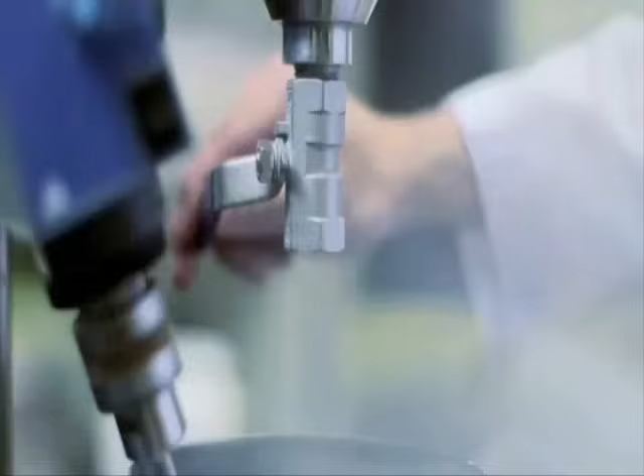At present, SMS offers a wide variety of modified tapioca starch products for applications in various industries, such as the food industry, the paper industry, the adhesive industry, the textile industry, and also for the construction industry.

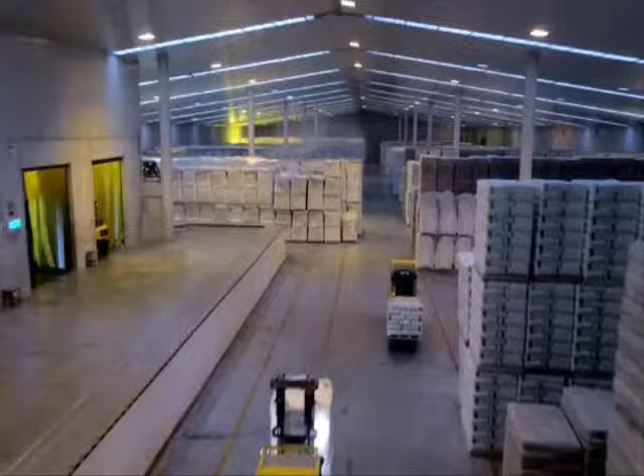Has earned carbon credits of the CER's Certified Emission Reductions type from the Clean Development Mechanism Executive Board under the United Nations Framework Convention on Climate Change, UNFCCC, for reduction of 100,000 tons of carbon dioxide per year. This testifies to our determination to play our role in environmental responsibility.

By adhering to our philosophy that we believe in creating value from tapioca starch through science, technology, and knowledge management in an overall business process, as well as through dedication of human resources.

SMS Group is committed to our mission to create value, to foster ongoing development, to create first-rate innovation, and to improve the quality of life of consumers worldwide.

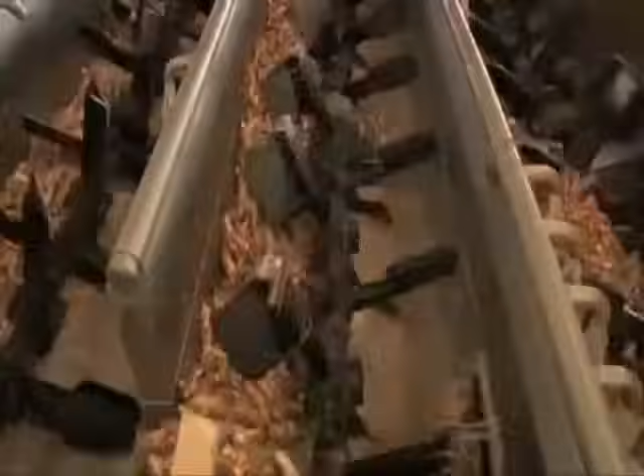Tapioca is one of Thailand's important economic producers. There is root production of 22 million tons a year. It can be turned into starch for consumption or as raw materials for processing in various industries such as food industry.

Textile industry, paper industry. Products made of tapioca are used both domestically and exported to other countries. As a result, tapioca is a factor that drives the country's agricultural economy.

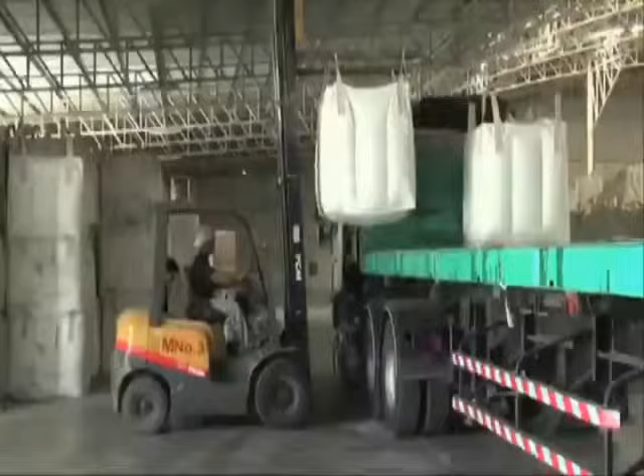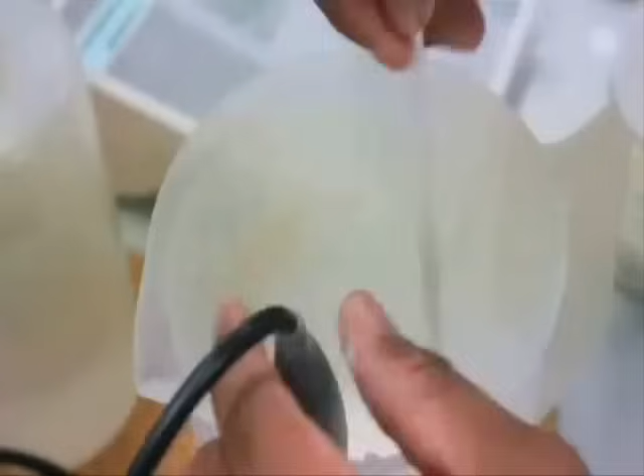Iem Heng Tapioca Starch Industry Company Limited and its subsidiary companies consider quality development of the products an important matter and have adopted the system called Good Manufacturing Practice or GMP, as well as production control and management system with emphasis on hazard analysis and critical control point or HACCP. This is to ensure the standards and quality of the company's products.

The company has been recognized and endorsed by various institutions as follows: 1. International Organization for Standardization, ISO 9001, version 2008. 2. Halal, by the Central Islamic Committee of Thailand. 3. Thai Labor Standards, or TLS 8001, by the Ministry of Labor. 4. Standard of Responsibility for Social and Environmental Impacts, ISO 26000.

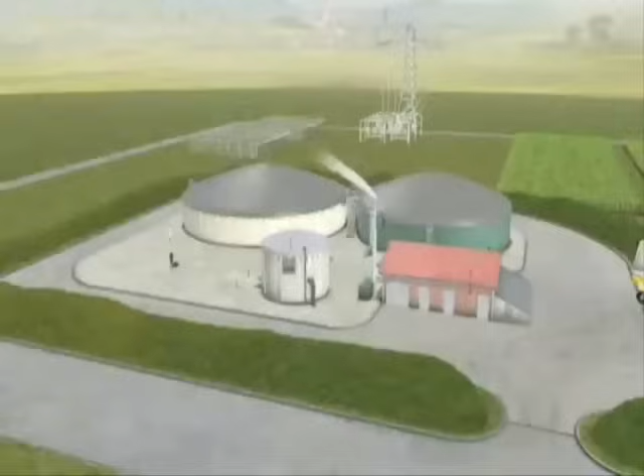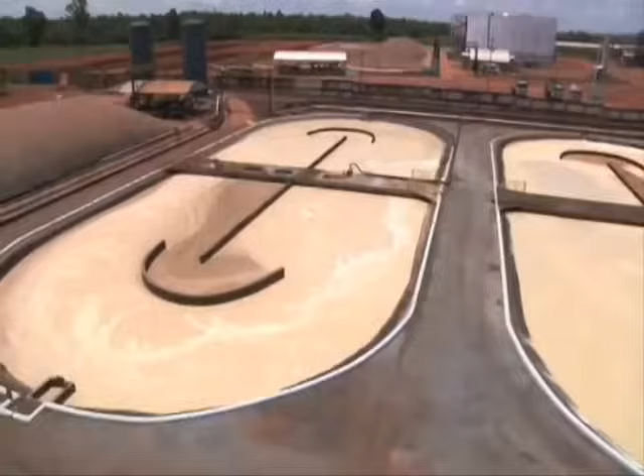In terms of public benefits, Iem Heng Tapioca Starch Industry Company Limited is aware of environmental conservation and global warming. It has set up various projects to conserve energy and natural resources, as well as occupational health and safety at work for its employees and community, such as: 1. Employs biogas from water treatment system to replace gasoline and save energy consumption, as well as to protect the environment.

On the other hand, methane gas can be used to generate electricity and sold to the government. In 2009, the company was awarded the winner of an ASEAN Energy Award 2009 in the category of renewable energy projects that are not linked to the electricity grid, or off-grid.

2. Water Grids Project, a water treatment service to produce and supply clean water to cultivators around the factory during dry seasons.

3. Set up the Agriculture Loving Community, which consists of 300 members. They have adopted His Majesty the King's self-sufficiency economy maxim to operate the community. The company has participated in the environmental governance project organized by the Ministry of Industry.

4. Set up the project To Be Number One Iem Heng, aims to encourage rural youth to stay away from drugs, including a focus on quality of life for communities and workers in the factory.

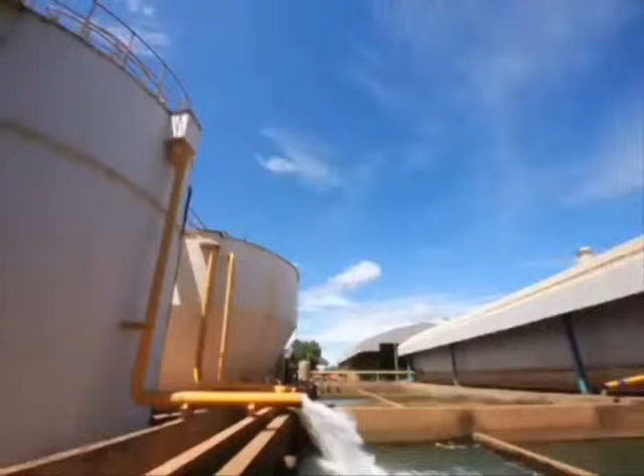From tapioca in the farm to big factory. From tapioca business to the country's leading tapioca starch manufacturer.

The determination of Mr. Bak Iem Sa Heng has become the aspiration of the Iem Heng family members to move forward, manufacture quality products to meet the demands of both domestic and international markets, to create jobs and opportunities for local communities and cultivators, as well as conserve the environment.

We are determined to take Iem Heng Tapioca Starch Industry Company Limited and its subsidiary companies towards stability and prosperity with the Thai society forever.

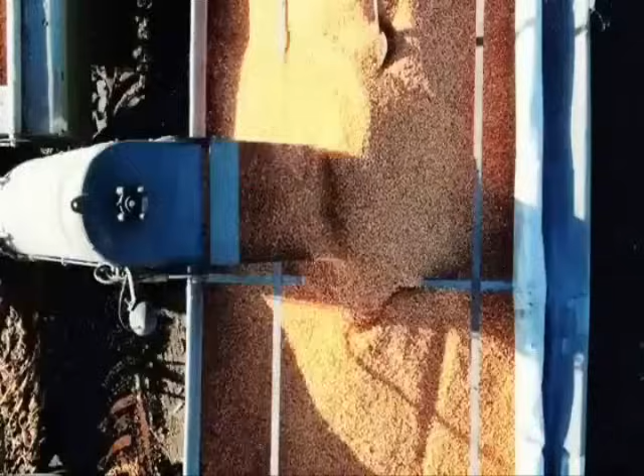Cassava is one of the main agricultural products here.

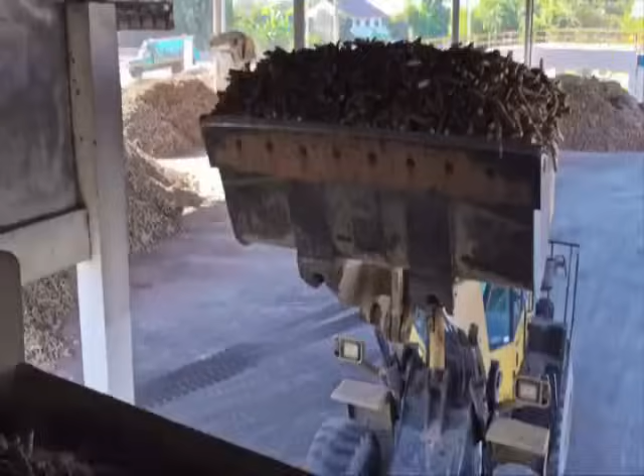The cassava brought by farmers is used as raw material and made into the tapioca starch by our production process. We are devoted to the quality of raw materials, production process, and high technology, as well as quality control, food safety, and perfection in every step.

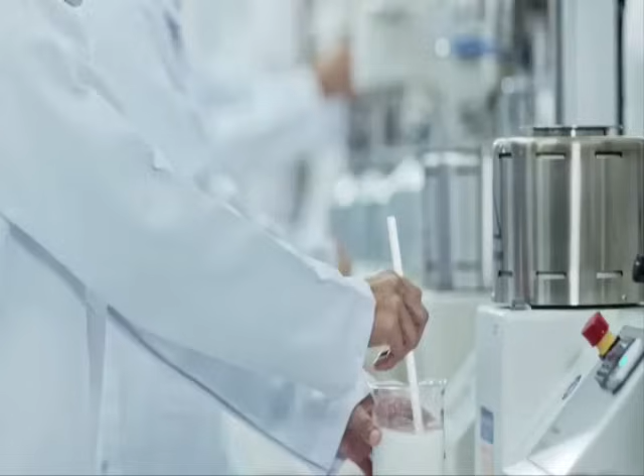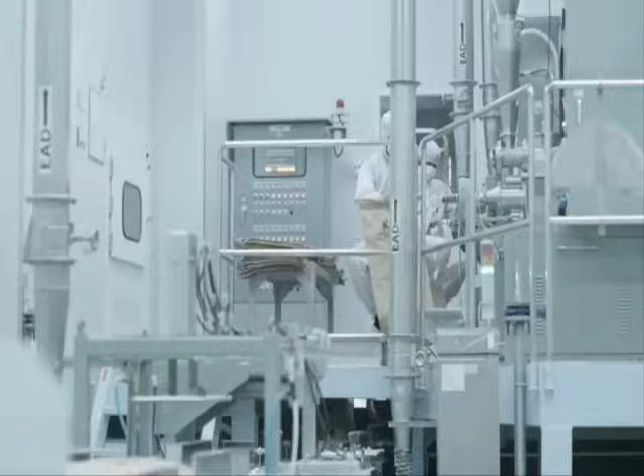All of us are proud of our products, and we strictly comply with quality regulations. We are determined to perform research and develop our products for better utilization in various food industries and to satisfy customers' needs. Furthermore, we have world standards to control every production process, packing, and loading so that we have confidence in our product quality.

We are able to deliver reliable and safe products to our customers all over the world.

Our factory takes care of the environment and energy saving with respect to local society and give good quality of life to all employees and the community as a whole.

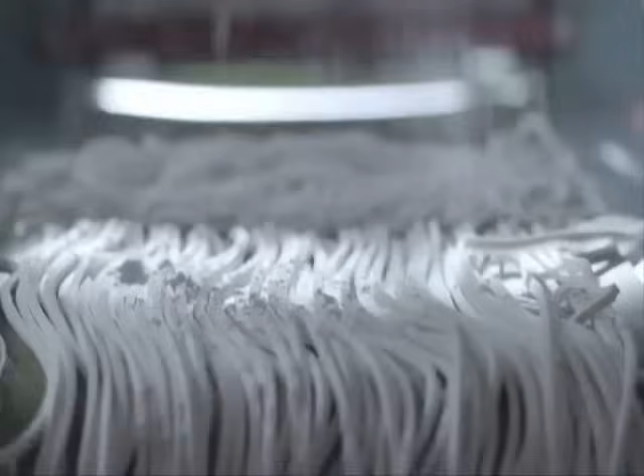Today, we are proud that our products are essential parts of various food industries, including but not limited to deep-fried products, meatballs, sauces, udon noodles, and bakery products.

Moreover, we are so proud of the uniqueness and function of our products, which help to improve the quality of processed foods. We supply to consumers all over the world the delicious experience from a variety of foods, which is produced by good raw materials and good factory.

We believe that delicious food will bring happiness, smiles, laughter, and beautiful memories. That is, mutual gratification and endless impression for all.

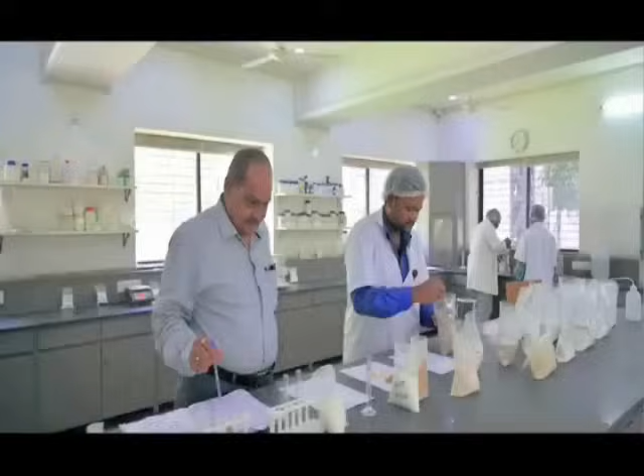Our state-of-the-art R&D facilities with cutting-edge technology are located in Lambha, Gujarat, and spread across an area of 15,000 square feet. Our R&D team consists of around 30 scientists, PhDs, chemists, and experts from various fields such as textile, paper, food, etc., who are constantly involved in creating new and improved products and applications at par with the latest trends and global standards. We are also working towards eco-friendly, sustainable, and cost-effective products.

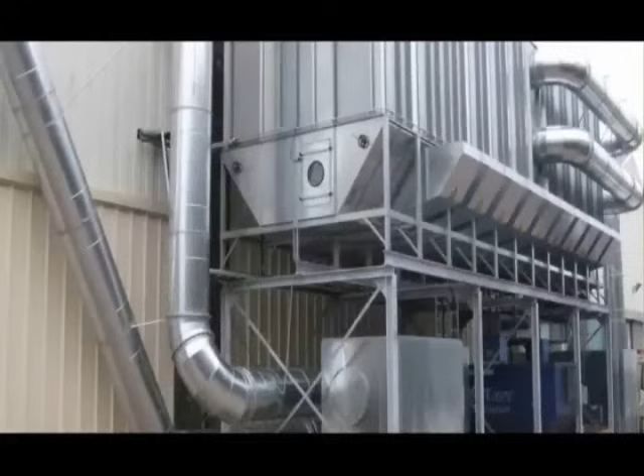We believe in adopting practices and developing solutions that lead us to a brighter and greener future. To name a few, we have constructed recharge wells, installed dust collectors, and adopted the practice of rainwater harvesting, a zero discharge effluent treatment plant, and wastewater treatment to reduce the emissions.

Sustainability is in our DNA. It has been a legacy spanning almost 7 decades of collaborating with nature, and we are growing at the rate of 13% per annum. There is no stopping us.

We are already the major player in the western and southern region of India. In the next 5 years, we have plans to cover the central, northern, and eastern region of India too. We are expecting acquisition of new starch facilities in India and around the globe.

With every milestone covered, we feel a sense of excitement and challenge that we love. We have spent all our lives discussing, breathing, and living starches. We will continue doing what we have done all these years: unravel the mysteries behind starch and making your lives better, easier, and happier.

We have started this company in the year 1951, and we have the experience of 65 years. We are into corn manufacturing and other derivatives industries. We have a backup by 24/7 to assist all the industries and to give the ready-made program to fulfill their ends.

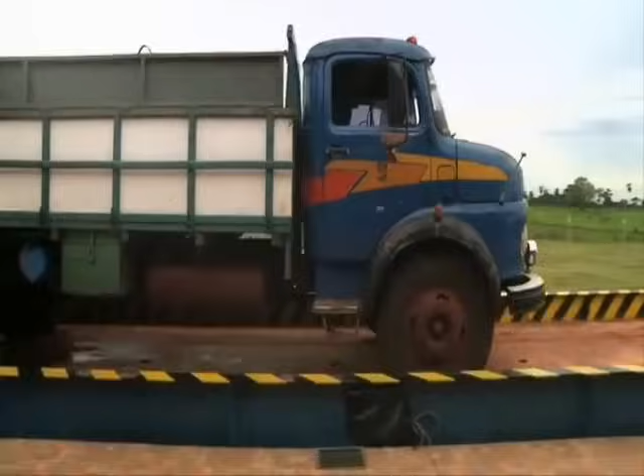Codipsa 4 has been built using only European technology and has a production capacity of 100 tons of starch a day, having the capability to double that capacity if required in the future.

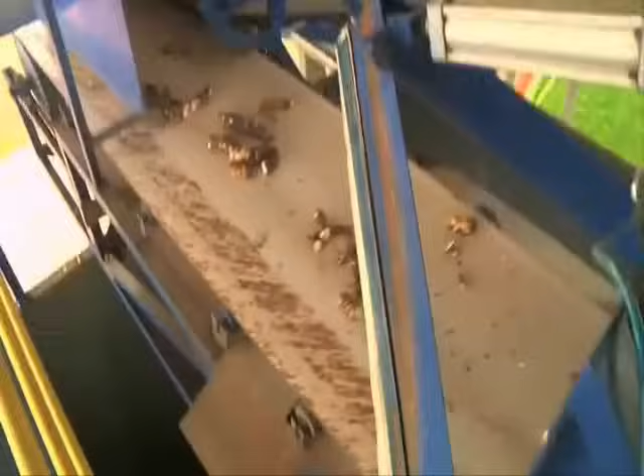Why did Codipsa have to look for world-class technologies abroad? Because Codipsa realized that the company has to be a first-class world player in order to be able to compete globally. We must produce the same quality of tapioca starch as other top producers in the world. But at the same time, we must be competitive. And to be able to offer that top quality starch at competitive prices, we realized that a good production plant is a basic requirement.

It's the only way to be competitive at a global level. We decided to go to Asia to see a Larsson plant in action for ourselves. And we saw that it works perfectly well. We saw all the advantages that a Larsson plant offers when compared to other technologies, local or conventional technologies.

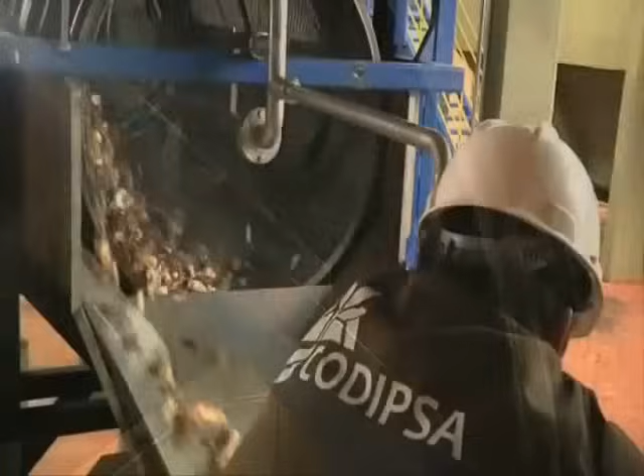At this stage, we made our decision. After having 3 plants using local or conventional technology, we opted for European technology. Our team analyzed a number of different producers of machinery and equipment for the production of starch. And Larsson was chosen because they are the ones who best understand the entire process of producing tapioca starch. Today we have a Larsson plant. With that comes a lot of hope and high expectations that with this technology we can be truly competitive in respect of quality and price at a global level.

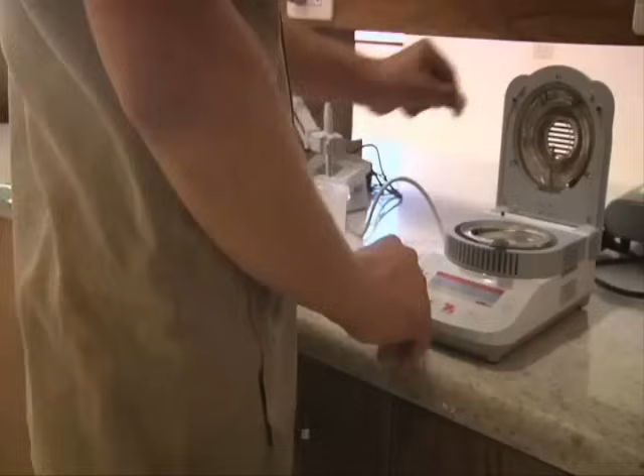Throughout the process, Larsson's designers and engineers worked in collaboration with Codipsa's technicians in order to find a sustainable solution, always keeping in mind local concerns. The main objectives were to improve the plant's capacity, the yield generated and the quality of the starch, whilst of course reducing water wastage and energy consumption.

Working with Larsson was a very exciting time. We started on the 5th of June in 2011 with the construction and then delivering of containers with all the machines from Sweden. During the installation, we had a lot of visits from Larsson Engineering, and it was very good working together with them, and we had a successful time completing the installation and have good value in the process.

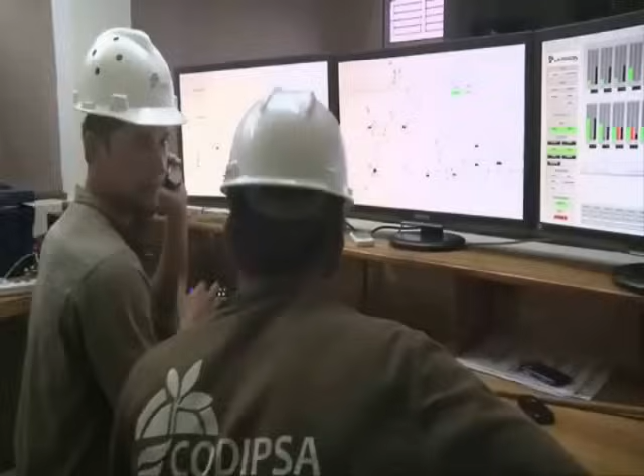Larsson drew upon its decades of experience in Europe and Asia to design the layout and manufacturing drawings for Codipsa 4. Larsson supplied all the hardware for the wet milling, all the software which controls the entire system, as well as key components for the dryer. For the remaining parts of the plant, they either advised on the purchase or designed the parts and had them manufactured by local workshops.

The entire process, from concept to commissioning, took only 12 months. The result is a fully automated, state-of-the-art tapioca starch plant.

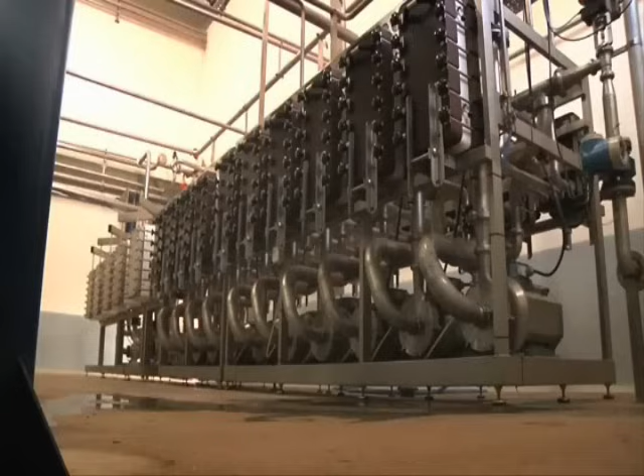Larsson's automated system not only ensures a consistently high-quality product with moisture content at 12-13%, but also helps reduce labor force. Despite its capacity of 100 tons of starch a day, Codipsa 4, for example, requires only 2 operators to run the system.

With Larsson's technology and expertise, Codipsa 4 is expected to obtain a yield of anything between 93 and 95%. That's very pleasing if compared to other production plants averaging 85%.

Here are some other factors that give Larsson a competitive advantage over other available technologies. By using state-of-the-art technology and an automated wet milling area, Larsson manages to halve the water consumption compared to other systems.

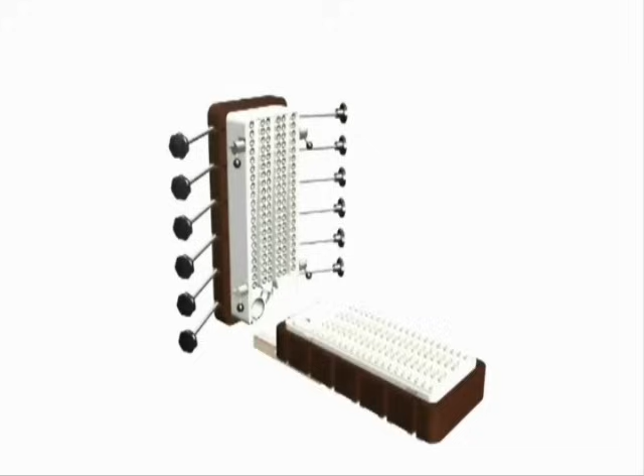Inspecting hydrocyclones can be a daunting task. With most equipment available on the market today, it usually takes 6 to 8 hours. With hydrocyclones designed by Larsson, on the other hand, inspecting is very simple and will take only a few minutes.

Larsson incorporates in its system sand separation equipment, which should be cleared by an operator every 8 to 12 hours, improving the quality of the product by reducing ash content and black spots.

Larsson centrifugal sieves are probably their flagship product. Invented by the company's founder in the 50s and continually developed over the years, today it's operational in over 50 countries around the world. Larsson centrifugal sieves are used for different applications, from starch extraction from rasped potatoes and tapioca to the fruit juice industry.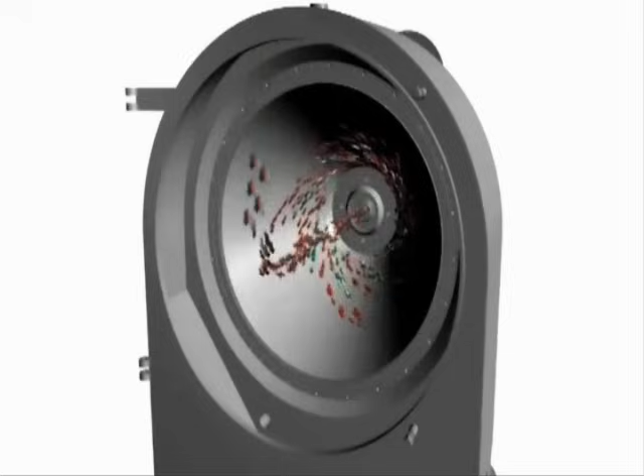But in this case, at Codipsa 4, the perforated stainless steel sheets are used for starch extraction and fine screening, requiring zero maintenance and guaranteed longevity.

In order to meet today's high hygienic standards, Larsson designed a rotary vacuum filter to dewater starch slurry. The filter is able to eliminate the liquid at an early stage, giving the benefit of longer dewatering time, significantly more than comparable machines available in the market today. On top of that, the filter is fitted with an automated downwashing system.

At Codipsa 4, the starch is cooled after drying and before the buffer tank, reducing the risk of condensation and bacteria development.

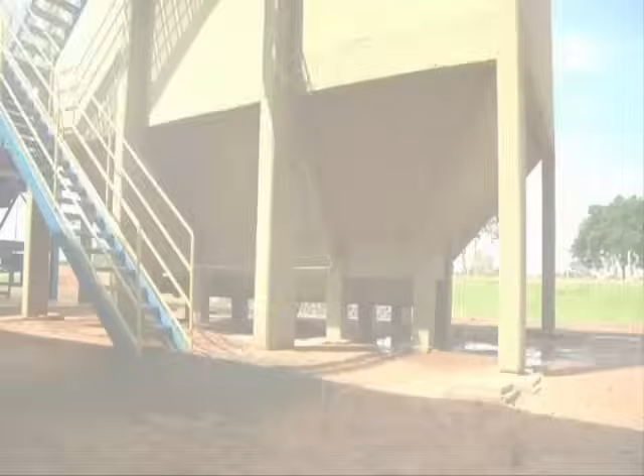Here in Paraguay, the fibers extracted from the process are used for cattle feed. However, in other countries, fibers are already used in other food industries. It's expected that the same will happen in Paraguay in the near future, and Larsson hopes to be able to add value by implementing one of its latest developments, a pulp press that begins the dewatering process of the fibers before drying even starts.

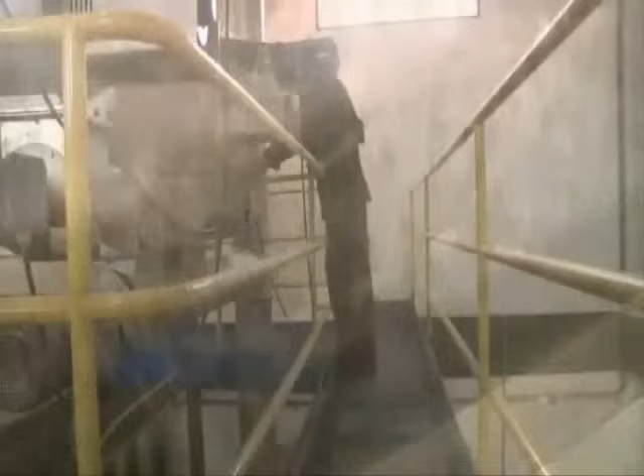We realized that Larsson understands how to process tapioca properly. Because of their deep knowledge of the products, in this case the properties of tapioca, it is this knowledge that allows them to manage the starch production process so efficiently.

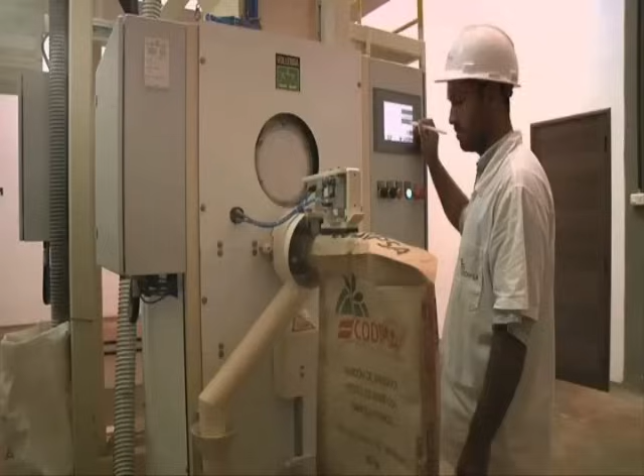Many of our clients in important markets such as Mexico, US, Europe, and some African countries, as well as Chile, often ask us, as one of the first questions, what starch manufacturing technology do you use? And they become increasingly confident in our product when we say that we're improving, that we have started with local technology, which has its advantages in some markets, but that now we have introduced state-of-the-art European technology such as Larsson's.

Today, Larsson's technology is at the very top of the world's best technologies on offer for the processing of tapioca for starch manufacturing.